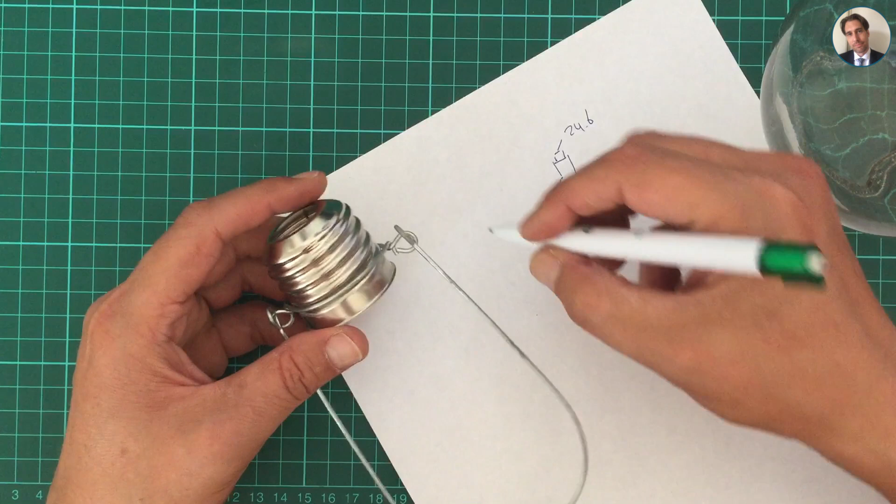This was 24.6, and the other measurement I need is this diameter, and that doesn't have to be a really tight fit, could always use a drop of super glue. 19.2. How am I gonna draw this? I'm just gonna draw it like this, like that, and then there's the diameter, which is 19.2. So with these two measurements we can go to the design phase.

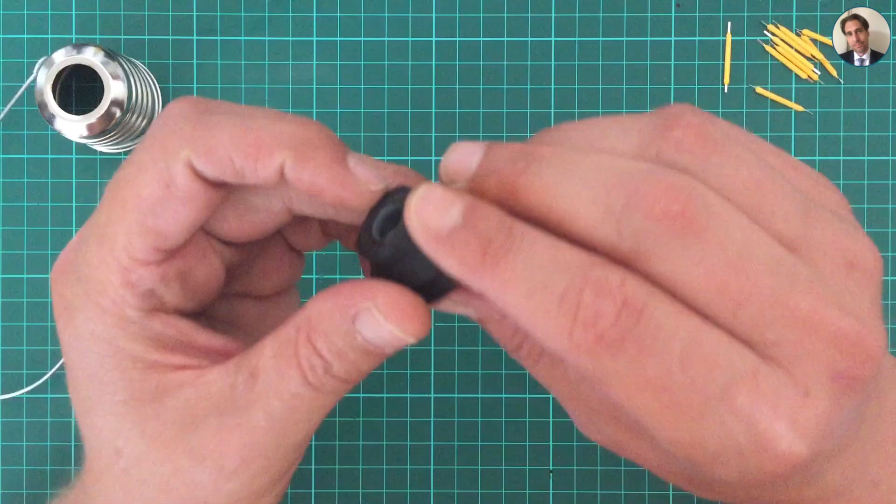So the piece actually turned out pretty good. The top not so much, but that's because I have some adhesion problems and I haven't leveled my bed in a while. The rest is pretty okay for what it's doing. You can barely see it when it's in. This goes in there, and then the top screws on, and it's a bit of a loose fit, but that's okay. It doesn't have any stress on it.

It's just hanging there. So the next thing I have to do is work out how many LEDs I'm gonna put in series, because I'm gonna put them all in series, and what looks great. So here's a pen. Actually, this is paper. This is a pen. My plan is to go with 5 LEDs in series. So one LED, another LED, one at the top, one over there, and one over there. And in between these two pieces over here, I'm gonna put some copper wire.

So what I now need to do is work out how tall this is gonna be, because it's gonna fit inside the lamp like this. So 2 LEDs, 1 across and then 2 down again. Work out how big it needs to be, and then cut all the, or actually I just need 2. I need 1 over there and 2 long pieces at the bottom. I'm gonna measure those out and use a little sandpaper to clean off the coating that's on there to expose the copper, so I can solder to it.

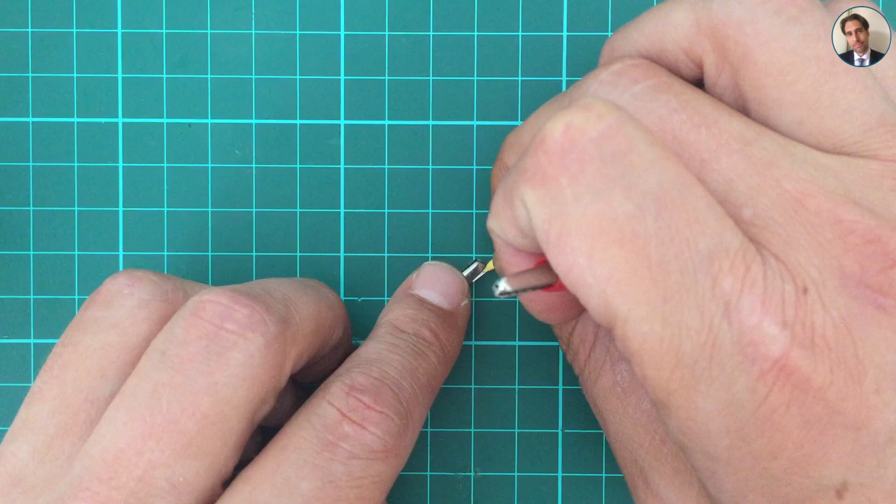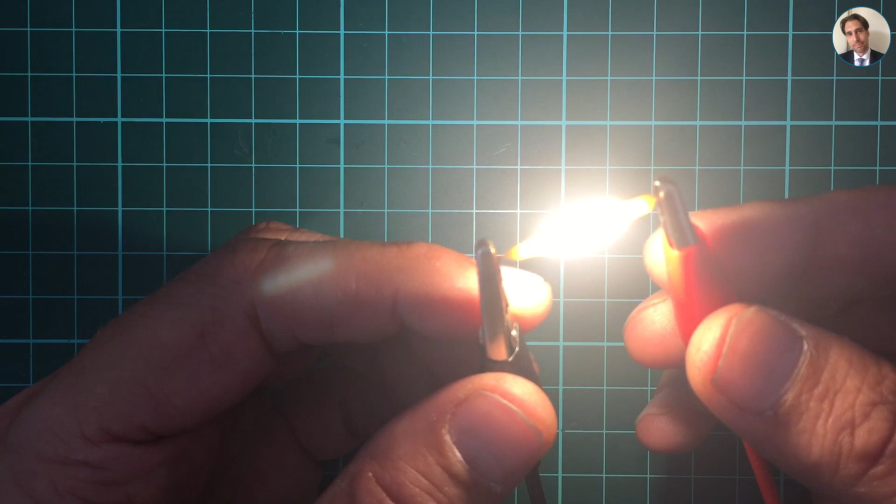Switch it around. So this is the negative side. I'll just do it like this, that's easier. And this is the positive side. As you can see, I'm not holding it steady, but that's it working. So I have to remind myself, don't put 2 holes together, because then you get 2 positive sides together.

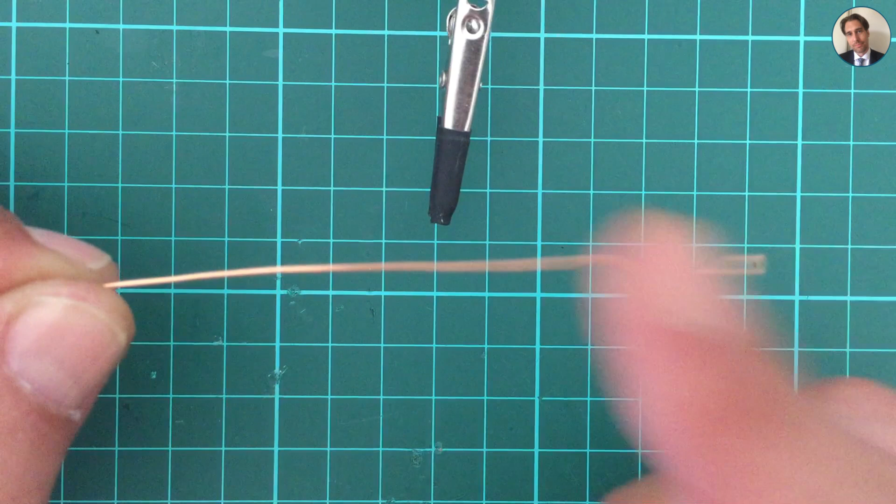So now I have to take 2 long pieces of this enameled copper wire. Grab some tweezers. Well, that's a good length. And about the same. There we go. And I have to take a little bit of sandpaper. This is some 400 grit wet sandpaper. Well, actually it's dry, but you can use it wet as well. I'm going to use it dry just to remove the coating that's on the copper wire.

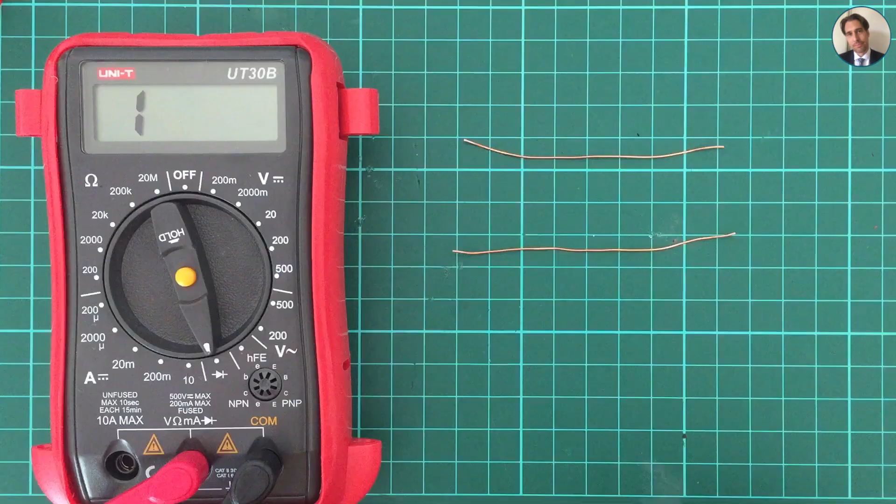Well, that was a pain in the A to get off. The sandpaper took a while.

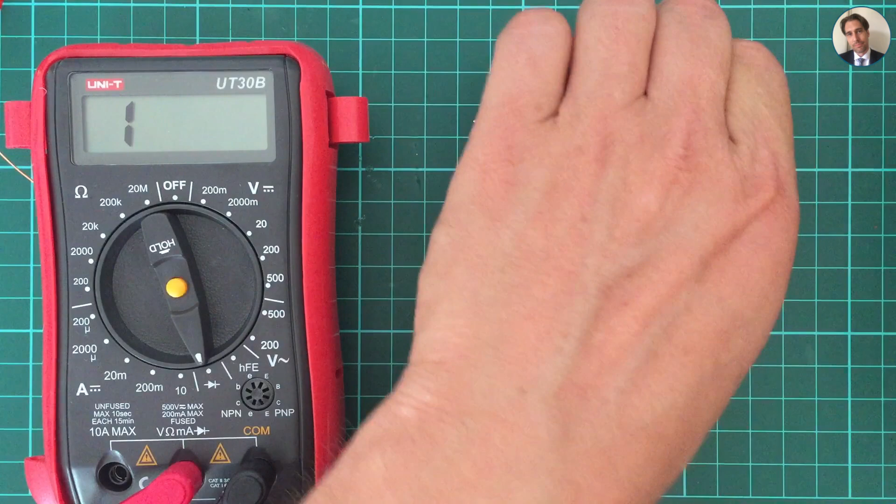Just to check whether I got enough coating off to get some continuity. That's okay. And that one seems to be not quite good yet. So there we go, finally. Check the other, just to be sure. Come on. There you go, let's solder these on.

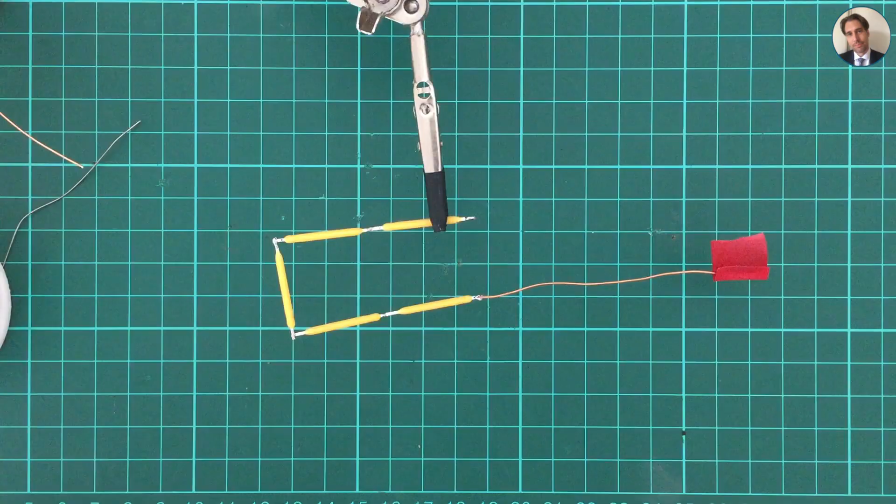Actually, I have a better idea. Just to limit the current flowing through these LEDs, I'm going to put a resistor in series. Gonna use a 1 ohm resistor just to do some current limiting. So there we go, all done. The 1 ohm resistor is in its place, all the LEDs. I hope I soldered them on correctly, with the negative side facing the positive side.

I've got my power supply hooked up. This is the positive side, this is the negative side, and there should be no bang, which is a good thing. Make sure I don't short them out. And I'm slowly going to ramp up the voltage. It's now at 11.4 volts. Ramping it up. There they go.

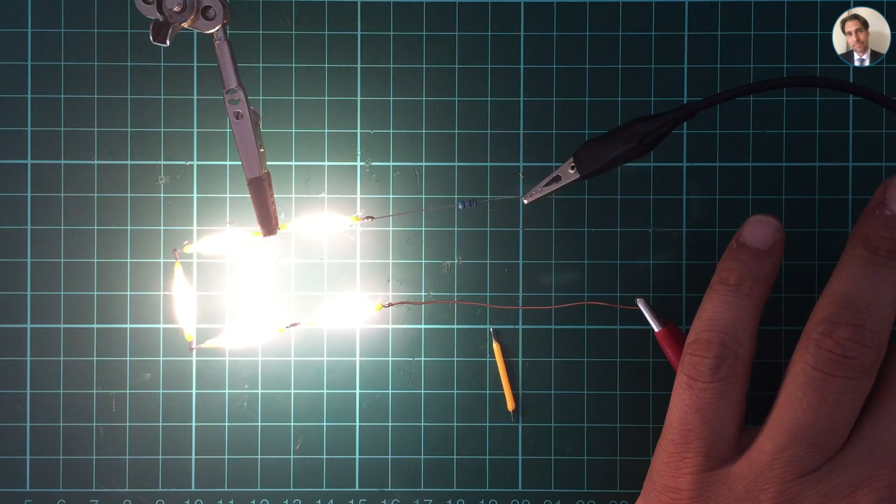12.9, 3. And my connection has loosened. Just make sure that's on there. There we go. It's not a really good connection. There we go. Don't move. So 13.6, 14, and this is about 15 volts. That means each LED gets around 3 volts.

It's not registering the current on my power supply, which is a DIY power supply. So I'm just going to hook up a multimeter to see how much current it draws. So here we go, I've hooked up the multimeter. Power supply is set to 15 volts. I'm just going to cover the LEDs with my hand because they're really bright and don't show up really good on camera. They flood the camera.

So I'm just going to measure the current, and it's slowly creeping up. It's about 66 milliampere at 15 volts.

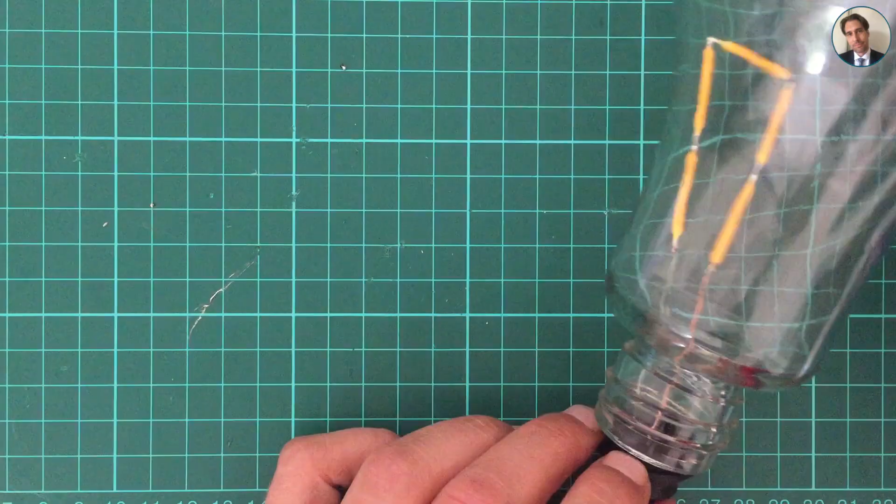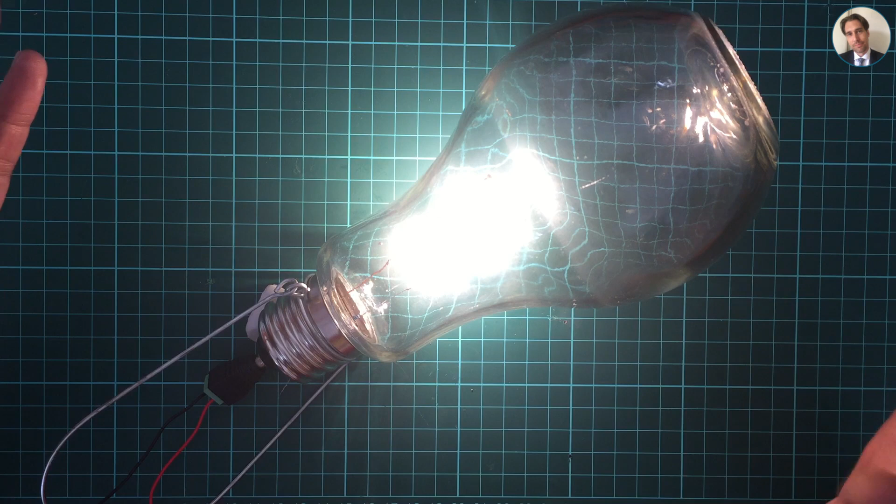And there we go. One weird looking mega light bulb. It's working. It's not connected to a power adapter yet, just connected to my power supply. Turns out the 15 volt power adapter I had didn't work. So this is it. Let's see if I can dim it a bit. You can see the individual LEDs.